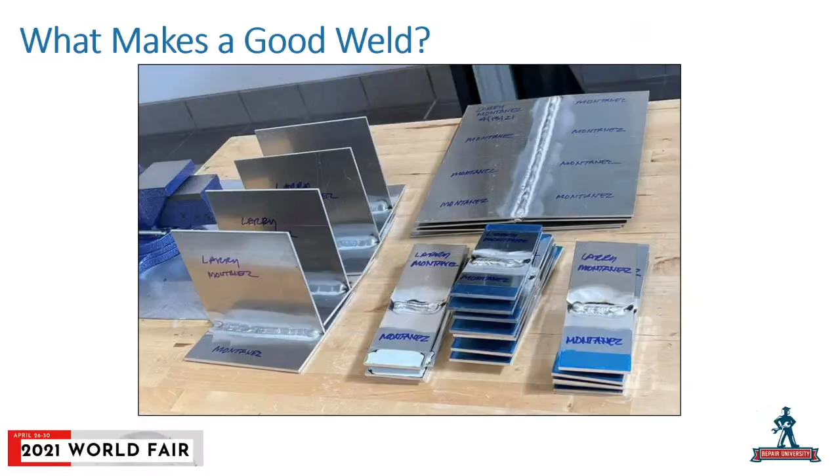We hassle Larry a lot, but let's give Larry his due as well. This is your most recent work. Good, thanks. A golf clap for Larry.

One thing I want to kick back to is the reason we're doing the weld strength show: cars are held together with welds, and if we're not practicing, our first few welds may not be good. So we need to do weld tests, destroy them, and talk about the mechanics of it. But as an industry, I hate to say it, we don't weld well.

It just goes back to practice. We'll talk about aluminum at the end, but with aluminum you've got so much more because it's got to be clean. In this case here, this is my Mercedes-Benz welding test I recently took.

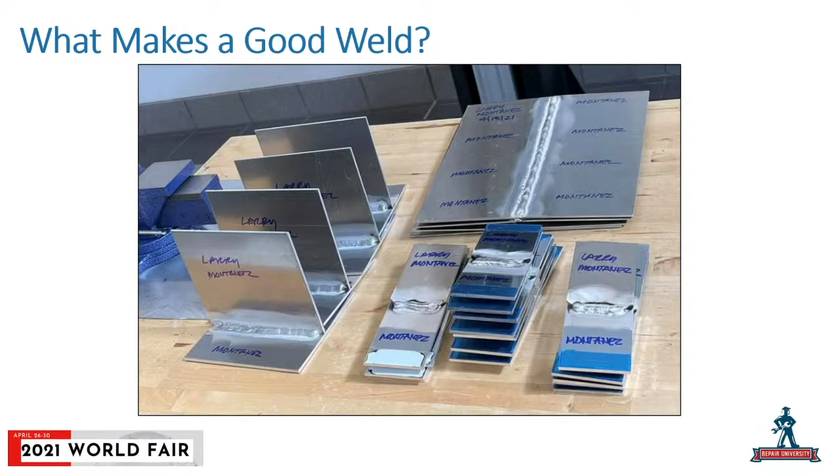Those 4 plates in the back, the really long ones, the 300 millimeter ones, I think that's 10, 11, 12, and 13 that I made. The rest, the first 2 or 3 were good. I had a little divot in one spot, or a little suck back in one spot. It's like, oh man, 300 millimeters, and I got this one.

The T-welds are pretty easy. I made 2 practice ones, then blew out all 4 of those. The cast ones, I basically just make them and start welding. I might have one bad one out of the 5 or 6 I make, and then they're ready to go. Then I choose which ones I'm going to put in for testing.

Concrete floors, lifting things without using my back, without my legs, and your shoulders hurt, and you've got this big huge plate you keep bolting to. So it's this kind of motion constantly, but you're doing it 12, 13 times, and then you're welding like this. It's a younger guy's job in a way, so it can be nerve-wracking, but the practice comes in handy.

I still want to dive a bit more into aluminum when we get to it, but I want to take a different approach to your question about how often you need to practice. I can appreciate where he's coming from and don't disagree with any of it. For me, the most important thing is that you practice before you weld on the car, and you've got everything where you need to be before you make that transfer.

This afternoon we're going to talk about practice welds and why, you can see a bunch of coupons we made here, why I don't want to take this and then jump over to the car. We're going to talk a little bit about this afternoon. But that's my answer to your question.

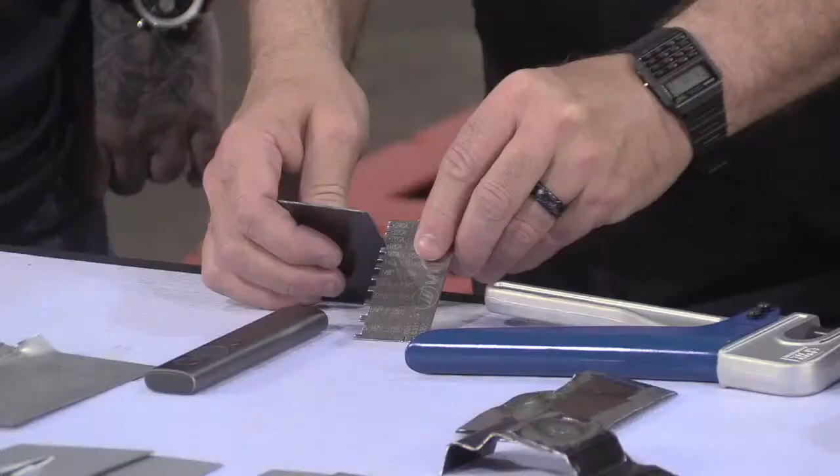Let's prop that up for you, Avery, maybe here, if I can, maybe not. It's okay, I'll hold it. All right, try and do it that way.

So now I know whatever thickness of material I've got, and then I can look at that OEM procedure and say, well, what electrode wire do they recommend? And more often than not, if I'm dealing with 22 or 20 gauge, it's ER70S-6 or 3, 024, 023, depending on your material supplier.

If I start getting a little bit thicker material, 16 gauge or 1/8 inch or something, now it might be 030, 035, kind of the high end for steel. So we're typically dealing with 023, 024. 030 or 035 are going to be the most common three, and the ER70S-6 or 3, depending on what manufacturer. So now I know I've got my electrode wire, I've got my material thickness.

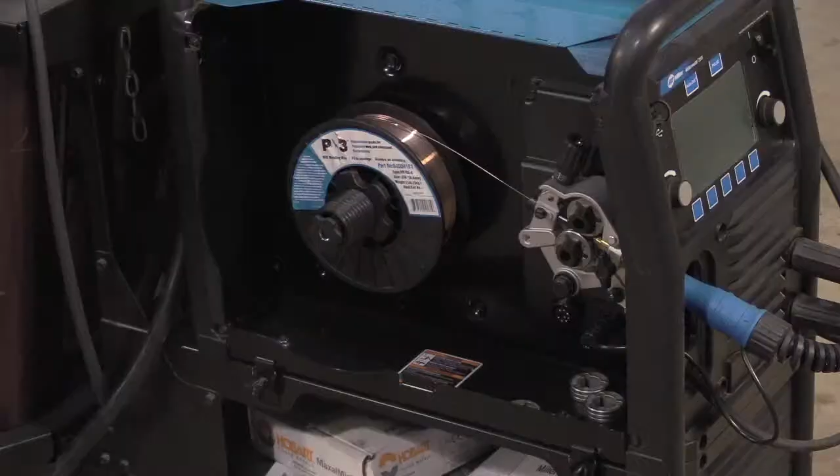Now I can open up my welding chart, my welder, and look and see where I should start my settings. I think it's obviously a great place to start, and I'm going to fine tune from there based on how fast I'm going to go, how slow I'm going to go, maybe my own personal technique, stickout. There's a lot of variables, so this is just the base part of it.

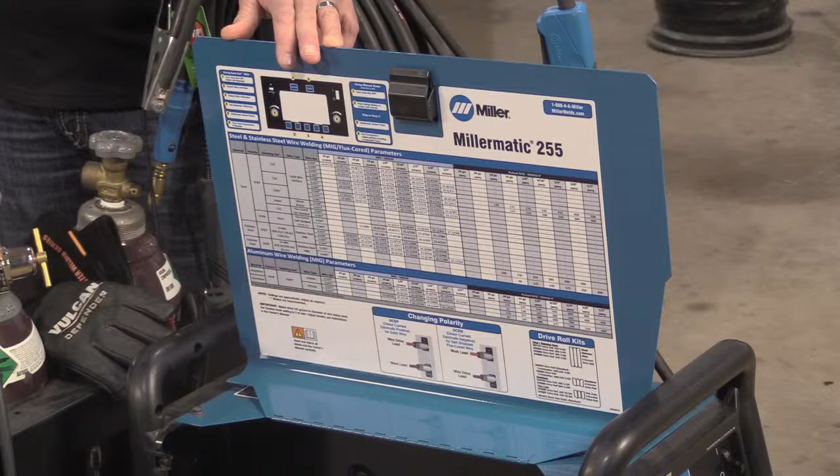And then this particular machine has the auto set feature on it as well, that you can just set the material thickness, the electrode wire, and the material thickness for the particular welds you're going to be making.

So auto set is not a substitute for test welds before you work on the car? Correct. Yeah, and again, same thing there with the auto set, we can still fine tune from there. But I mean, I love the auto set on the Miller machine, and obviously the charts from the equipment makers make it a little bit easier to know exactly what I'm going to have to deal with. But it just kind of gets you over the target.

What are some of the variables or hurdles that I might encounter in that process of identifying the material and then looking on my chart and setting up? What are some of the things that might go awry? Well, you have a definite substrate difference between a mild steel panel, a high-strength steel panel, high-strength low alloy, or even an ultra-high-strength martensite or boron-alloyed steel type material. You have to take that into consideration. They're going to weld differently.

GM has a panel with a coating on one of the reinforcement panels that was a little difficult to weld. Almost like aluminum, you had to super clean it down really well to get a good weld. If anyone's welded galvanized steel like you see in heating ducts, it's next to impossible to weld. It almost looks like it's got a starburst type silver spray paint on it, and you've got to get it off because that's how that material is made. It's not painted, and that's why you always see raw metal versus galvanized.

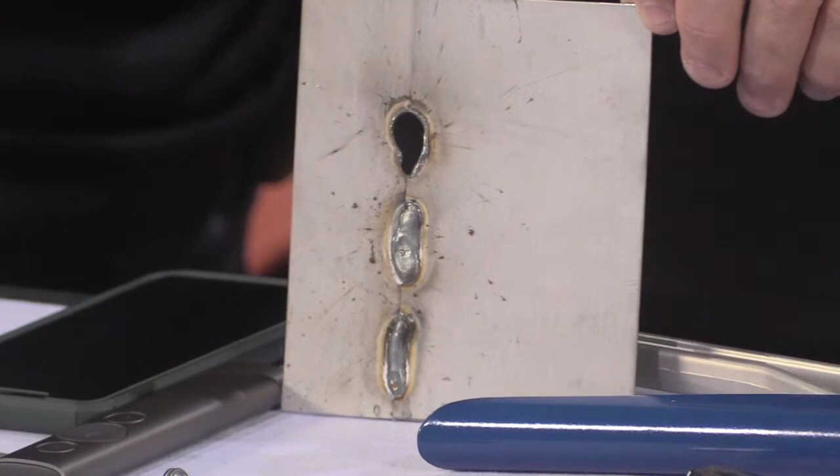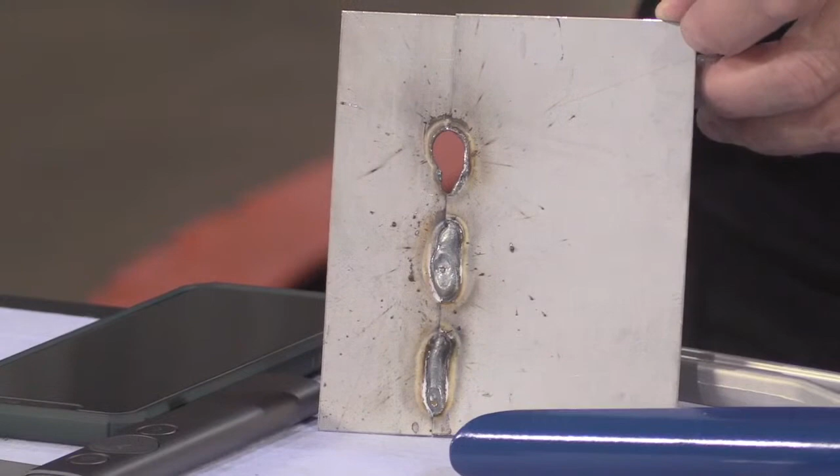Did you do those? Yeah, I have made some bad welds too, right? I think your setting on the first one might be a little off. It was plastic repair yesterday, and now it's welding. Well, now you can rivet it - now you got a hole punch for a rivet, a very large rivet, but you made a rivet hole now. I was going to make a Mig brazing slot weld. I see what that looks like. I'm getting you a drill bit and a grinder for Christmas.

All right, so this one, I used the auto set on this Millermatic 255 here, but I had it set for 1/8" steel. Now, 1/8" steel compared to - 1/8 is 0.125 and 22 gauge is 0.030, so there's a pretty big difference between the two.

So yeah, as soon as you squeeze the trigger on this one, boom, it blew a hole in it, like it wasn't even thinking about it. So you basically made it a plasma arc cutter, right? Exactly - an expensive plasma arc cutter.

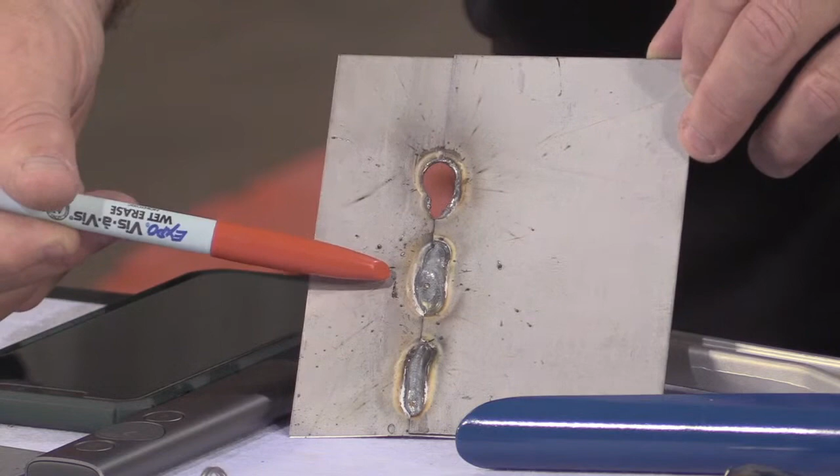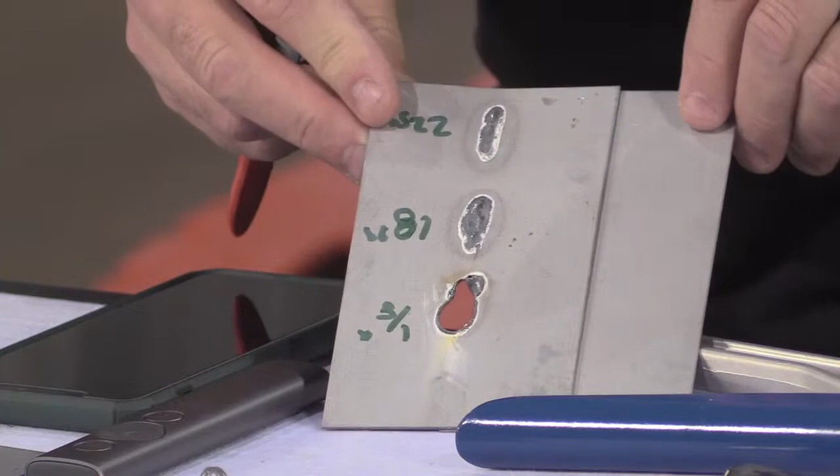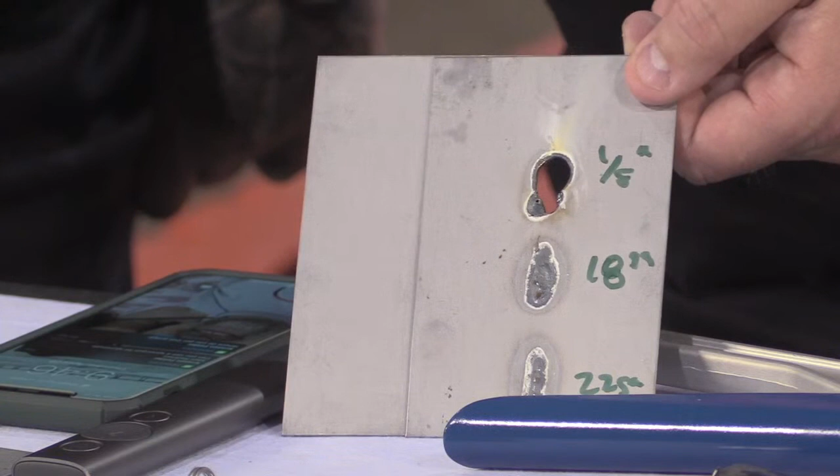Now this one was made with the 18 gauge setting, just the auto set, no fine tuning, and this one was made with the 22 gauge setting. This one here, from a profile standpoint, is a little bit flatter, a little bit hotter, so it got in there a little bit quicker. The 22 gauge setting is a little bit higher. Penetration on the 18 and 22 isn't bad - I've got decent penetration on both. Realistically I want to be at the 22 gauge setting, but based on my speed and technique, I could potentially get by with the 18 on this one.

But I think it's important to make sure you've got the right settings - that's kind of where I wanted to go. The one thing with these charts inside the machine that I have trouble with is I get lost. I start, okay, get this wire, and as I move through a chart, next thing I know it doesn't seem right, this seems like the wrong setting, and I go back and maybe I was on flux core, or maybe I was looking at the 22 gauge chart instead of the 035 chart. So it's paying attention, reading, interpreting, and knowing where is a great place. But like I said, it shouldn't have been an issue on this auto set machine unless you set up for the 1/8 by mistake.

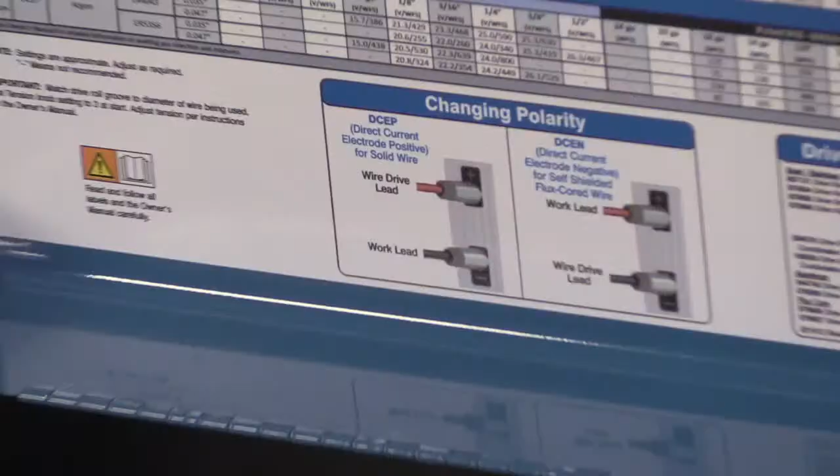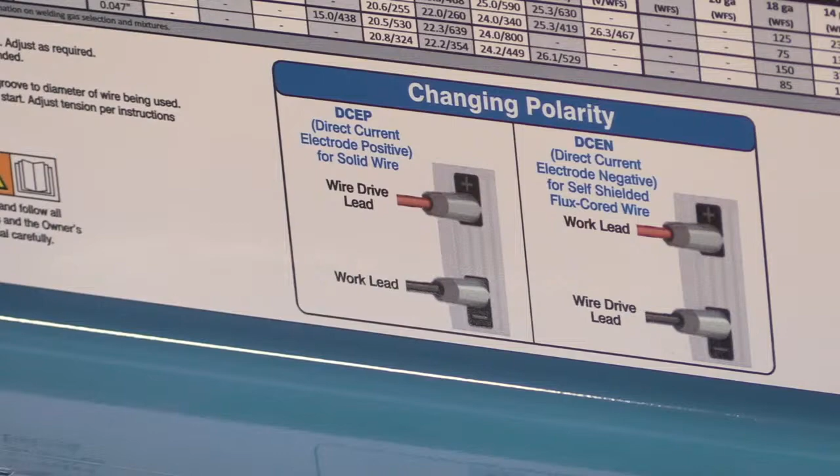Shops have to realize that Miller, or any welding company, makes welders not just for cars - for industrial stuff too. And they usually come DC negative, and if you look inside the machine it'll show you that you've got to switch the red and black wire to go DC positive. If you just open it up, put it together, and go to weld without an equipment guy setting it up, you're going to start this thing up and it's literally going to become a plasma arc cutter on this thin material. No matter what, even at the lowest settings, it's still going to zap through stuff, and the wire's going to burn back into your tip because it's made for frame machine welding, flux core - that's what it's designed for. So now you've got to switch it, that's all you've got to do, and then all of a sudden all the settings and everything work better.

So just keep that in mind. You should only have to do that once because you're never going to go back.

But yeah, if you buy from a company that has a tool supply that's going to deliver it and put it together for you, great. If you buy a Miller, a Hobart, or you buy something online that gets delivered, you check that first because you're going to go and maybe not practice and go right to the car, and you could have an issue.

And getting really familiar with this, if you get a new welder, spend some time with the chart so you don't wind up getting lost, right?

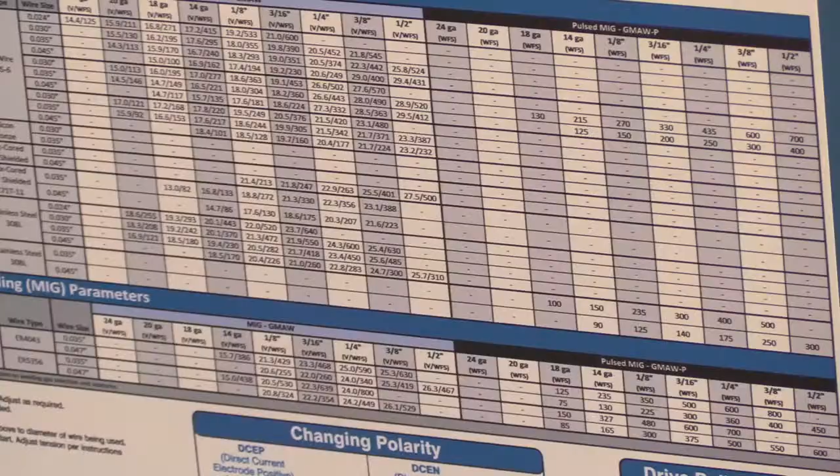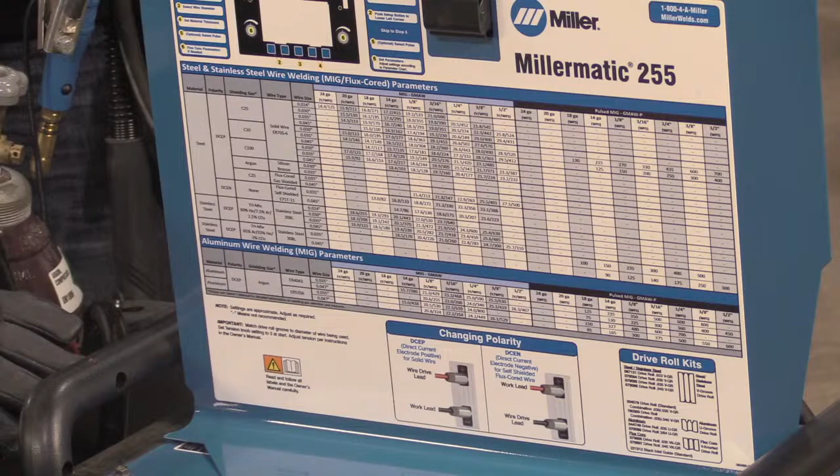Yep. And Miller has great videos online, just how to use their welders. You go online, either YouTube or their page, and they've got a whole weld theory thing you can watch, and they even have a little online testing thing you could do just for yourself. But they have videos on how to set this, how to set that, if you get bird nesting, how to take apart the spools and the drive rolls and how to put it back together. So just remember that.

So two things with that. One, Miller's recently released a collision-specific YouTube page. I should have looked it up beforehand, my apologies. I think it's called Blue Collision, or maybe that's not the name. So do a search for Miller collision. There's a lot of videos on there, including some Collision Hub videos. So thanks to Joe for that, and hopefully this one will end up there in the not-too-distant future as well.

So thanks to them. The QR code piece of it, the maintenance of it, we've been talking about, and we're going to work with Sled on this so that we've got some QR codes we can put on there. Take your phone, zap it, and it'll show you a video on how to change the drive rolls, how to change the electrode tips, how to change the electrode wire. But knowing what you've got in there and making sure you're watching those videos so you're doing it properly is important. And we're going to talk a little bit more this afternoon about the Collision Hub OEM Welding Validation Program. And we'll talk a bit about the drive rolls and a bit more of the maintenance and some of the courses that are around with that as well.

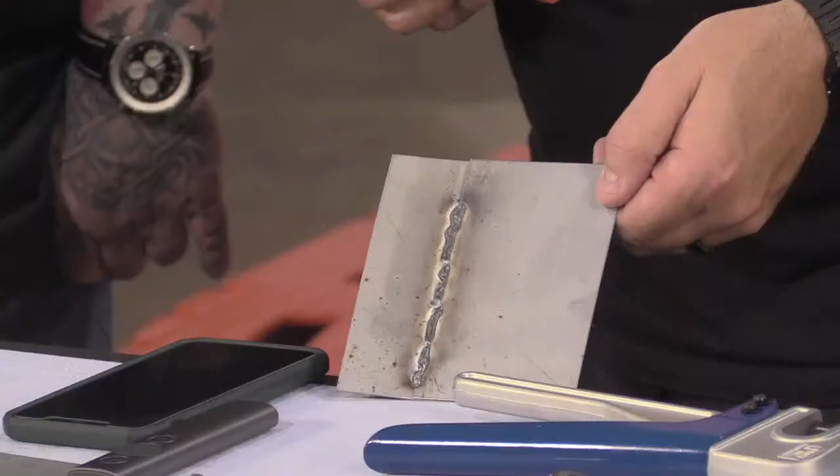So, all right, I did want to make one more point. What I did with this, I kept it on the eighth of an inch thickness machine, just to see if I could breeze through this thing with this 22 gauge. And this is kind of the result of that. So I had to go super fast. I've got a little bit of penetration here and there, but I had to go fast.

I missed the joint a bunch of times. I got some porosity because I was rushing. But again, this is something that we see on cars from time to time, right? And this is not a good weld. Clearly not a good weld.

No, and this was a setting issue and a technique issue all the way. Had I adjusted the settings to be proper, I might have had a much better weld on it. Well, to compensate for the overheating of it, or the higher setting, you had to run faster, which just makes you very sloppy and has you dipping in and out, and that's why you missed a bunch of times.

Yep, and the one thing about this is, so we've got the thickness, and we've got the wire size and the thickness, but the one thing we also have to pay attention to is what kind of steel it is too. Sure, is it high strength, mild, whatever it is. And then, so not to bash you here, but none of these would be test welds for any car you'd ever repair.

Right, this is just understanding technique and all that. Now, you might use this as a test weld for the car, but these right here, this is just practice, getting technique tuned in, and all that. Yeah, the I-CAR style coupons that you can buy at any metal supply company.

You can get them cut to whichever size, or some I-CAR instructor left a bunch over there when you took a test. Those are good to just practice and get used to the machine, get your settings. When you're ready, you need to cut material from a vehicle and practice the welds on the same type, thickness, material that you're welding on the car.

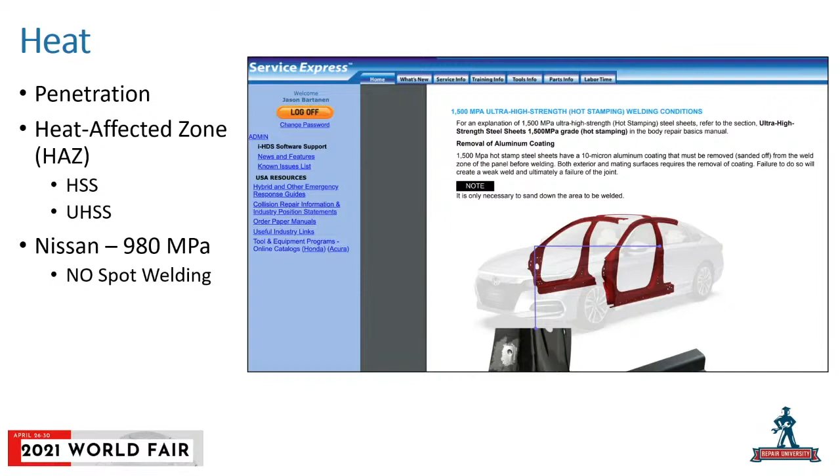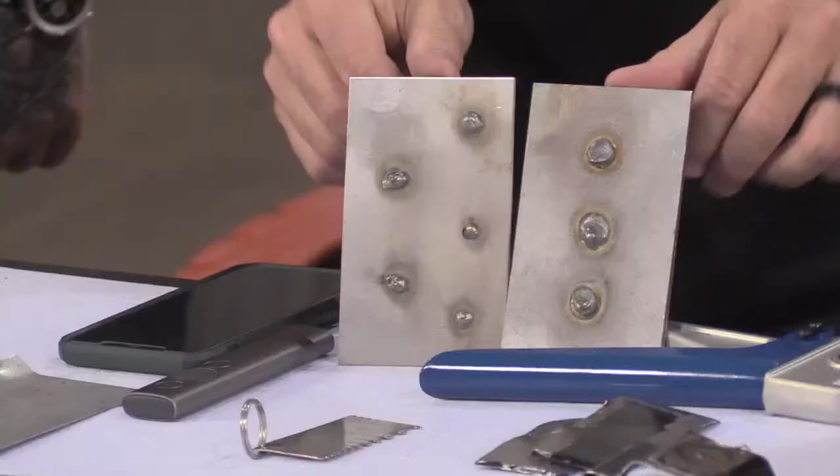So let's talk about plug welds for a little bit before we move on to electrode wire, technique, and beyond. What we've got here - we've got a couple different plug weld samples. Now we've got an OE, and most OEs are going to have a recommendation for plug weld size based on the material thickness and type. We may be doing a 6mm plug weld, we may have an 8mm plug weld. There's some 10mm examples out there as well.

What's that? I don't know what he's saying. No, okay. So what I've got here is some 6mm and some 8mm plug welds. These are 8mm plug weld holes, so the top coupon had an 8mm hole in them. Here he's going to come in - oh, there we go, sorry. That's what he meant. Oh okay, I thought I was stealing second.

So these are also made on 18 gauge coupons, which would make sense to have a little bit larger hole, an 8mm plug weld hole on it. So these are all pretty good. What do you think of those ones? Since you guys have been hassling me about everything else, are those okay?

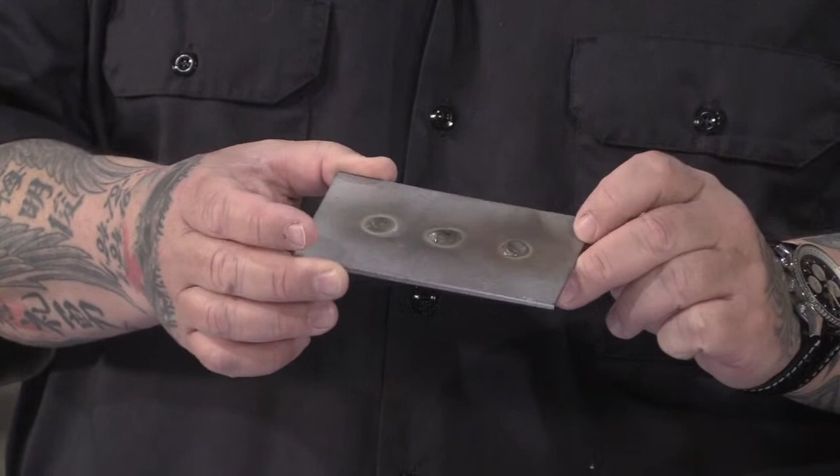Well, like anything else, you got to take a look. Most of them - there's two of them that are good. This one would pass, it just stayed there a little long. I'm going to try and rotate this a little bit, see if we can get that divot - Kristen made that one, okay. That's actually very good, Kristen. Normally the weld's over here and the hole's still there, but these are very good.

And then we have the back side, which should have a ripple to a certain extent - those will tear, and I believe all of them will tear. This one's just a little ugly and a little high and misshapen a little bit.

And these two are very, very good in that fashion there. Good, thanks Larry.

All right, pass from Larry. So what I've got here is a variety of 6mm plug welds, and I made these intentionally the way we made them. Let's flip this one up so I can see it. So this 6mm plug weld I made by just putting the electrode wire pretty much right in the middle of the weld. I squeezed the trigger and moved very little around that.

It's a small weld, right, 6mm is not very big. So I just made that one, got good penetration, and got a decent sized face on it. So I'd be pretty content with that. If I was going to make a bunch of plug welds on a vehicle that required 6mm, I'd be comfortable with that one.

This one, I started on the outside and worked my way in at about the same speed, but I had to go around a little bit more because I started on the outside of the weld. I got some decent penetration on the backside here. One thing, if you start on the outside, especially on a smaller weld, is that electrode wire can fill up that hole before you get into that bottom coupon.

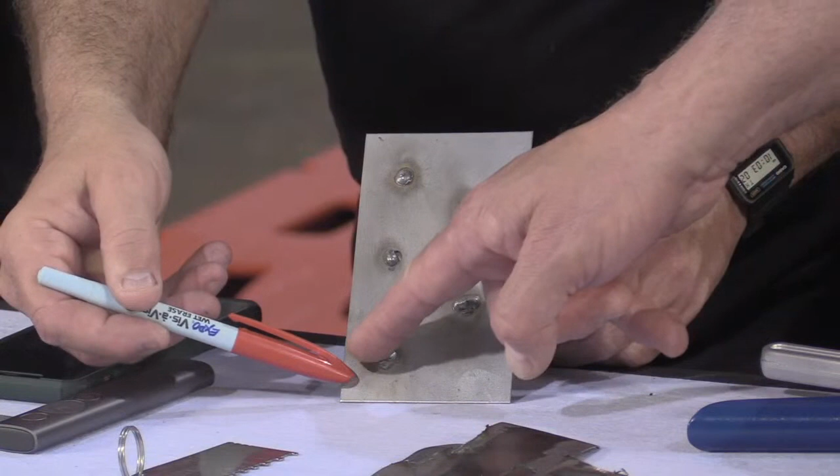So let me go back to this real quick. If you look at the heat-affected zones, the amount of heat radiating out from each of these, you went around and around on this one. Notice how big the heat-affected zone is around this one versus all the other ones. See how big this heat-affected zone is - that's an inch diameter almost. You're actually destroying it, throwing heat into it, which starts to change the molecular structure.

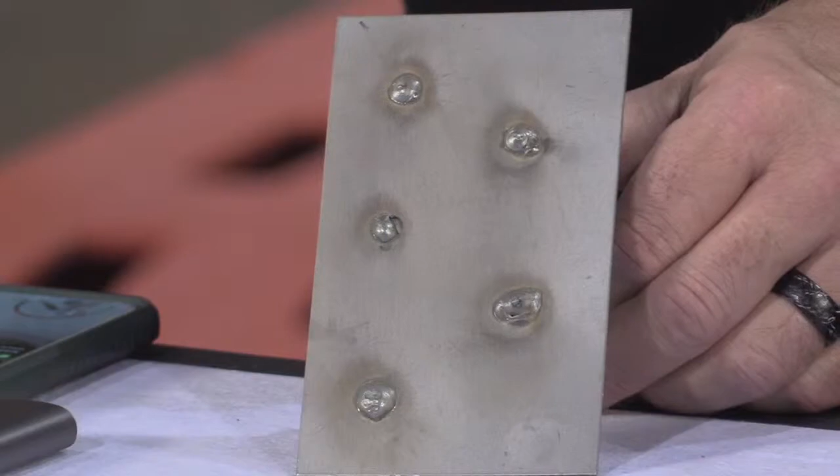Another thing about that big fat weld at the bottom, probably on the I-CAR test, which is where the 6 millimeter hole came from - more than likely you'll look at it and think this is a good weld. It might be a little high, but let's break it. The back piece might just fall off because you had so much heat, you never directed it to the back panel. You only caught the front panel, and as you welded, you literally welded the round circle edge, and the rest just overlapped and never grabbed the back. That's sometimes a false positive - it looks good positively, and then you go and destructively test it, and it's no good. I did something wrong here because I didn't point it at the back joint first.

We're going to talk about all that this afternoon - destructive testing and what happens.

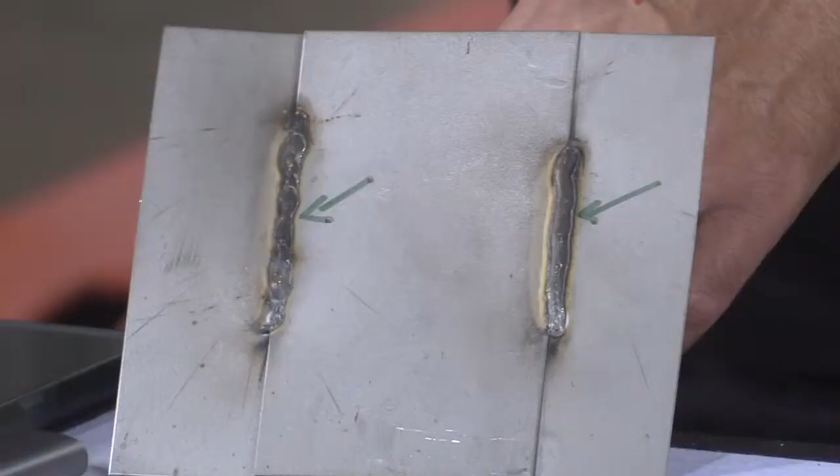Okay, so let's continue with technique a little bit before we jump into electrode wire. So this is a weld - these weld joints are ones that Mark recommended, and I thought it was a great idea. So what we've got here is one coupon sits below this coupon, and the arrows represent the torch angle I used. This one has the coupon underneath and this coupon on top, so this coupon is the top coupon on both.

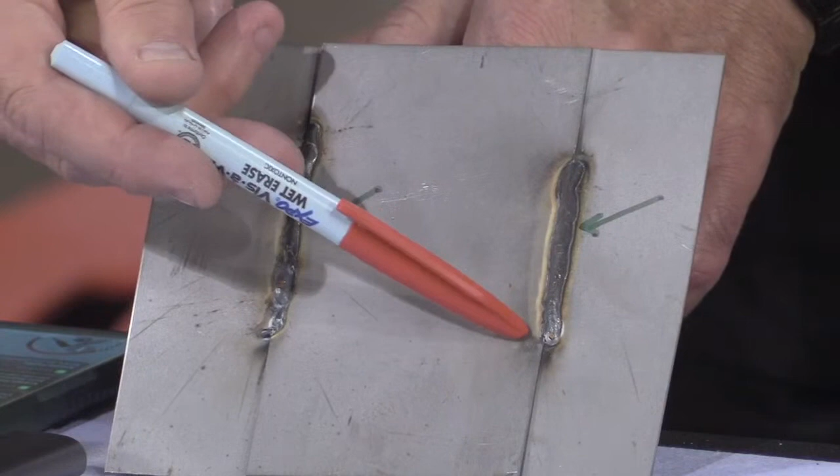But you'll notice this one, I forced the weld into the joint. This one, I forced it over the top, and the only time it would hit the bottom coupon is if I happen to break off or melt enough of the top coupon to get into it. So you can see this one is like a fairly smooth continuous bead. This one is erratic as can be because the wire's going out and it's missing and diving over the top - can't find it. Regardless if you had thicker and thinner here, the fact is you're feathering over the top of it.

It came down to technique. All my settings are great, the wire's good, I got all that dialed in, but because of my technique, I made these essentially the same speed, same thickness - I didn't let it cool, as you can see it's a little bit warped in there in between welds, other than to clamp it up. But the only variable was my gun angle on this one, and that's why it's important to be pointing it correctly.

Same thing with those plug welds - I want to make sure I'm moving that torch around. It's a lot of dexterity, not necessarily at 90 degrees. You want to be perpendicular to it on a plug weld, and stay in your weld, that's where you're punching. So technique's important as well.

So far, the only things that matter right now are heat, technique, thickness, electrode wire. Other than that, nothing matters - we haven't really talked much about the machine. After the settings are done, the rest is all on the tech - which I brought up earlier about it.

It's all on the technique. Just by the gun angle, same settings, you can make a bad weld out of something just because of the way you're running the bead.

All right, so let's talk a little bit about electrode wire. Question on steel: using 030 for outer panel works, but 025 or 026 will make a nice weld.

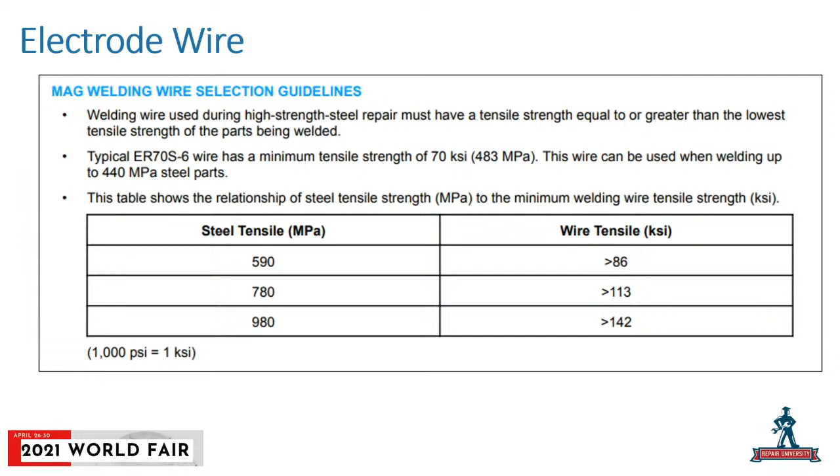So Honda allows you to use conventional ER70S-6 up to material that's 440 MPa. Now, if you get above 440 MPa, from above 440 up to, was it 900 the cutoff, or 1500? But regardless, they have a cutoff, and I think it's 980, isn't it Larry? So from 440 to 980, they have a special high-strength steel electrode wire that they require.

It's now - what was the old one? The old one was a Bosch wire. Yeah, you can get it. I know Pro Spot was selling it for a while, and there's some other equipment manufacturers. When it first came out, it was really hard to get, but now it seems easier.

And if you go on their repair website for Honda, there's actually a listing of where you can get this stuff. They have an article that they update every month, and it'll usually show when they change suppliers. They give you the website, the phone number, and the part number too. And it was really expensive - a little more pricey.

Yeah, the Bosch wire is still on there - .030 diameter, for welding joints, high strength steel, 590 and higher. So they've got a gap in their material from 440 to 590, that's the jump that they made. So you're not going to find 460 or 480 or DP 500 even. It's going to be 440 and lower for conventional ER70S-6, above that starting at 590.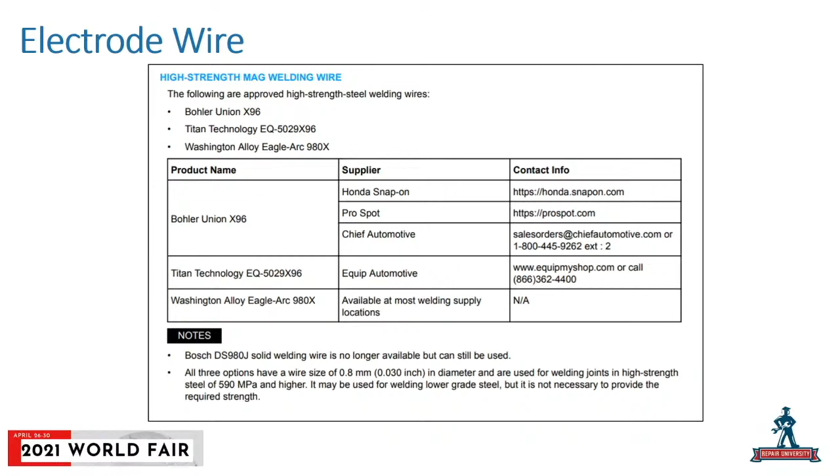We'll have to get confirmation, we'll follow that up when we come back in the practice weld show - so either up to 900 or 1500. I think it may be to 900, and then it just goes 900 to 1500. That's more of the non-repairable stuff, where you're just going to replace panels or components, put a new one on.

Welding it, yeah. And the other thing we wanted to look up too - you told me to do this and I failed you, Larry. I feel shame, I don't remember - was, can I use this Bosch wire on anything? I believe it's in the I-CAR article, and I've got to double check it. But we read some other things.

The price doesn't make sense to use the Bosch wire on - you have to use it on the high-end stuff, but if you're welding on the lower grade stuff, you could still use it, it just probably isn't smart because it's more expensive. So let's keep the expensive wire for the high-strength stuff. A lot of shops back in the day when this first came out said, I'll just buy the Honda stuff and use it on everything. No, that's $500 for a spool. It's crazy for the small spool.

Okay, so let's move on, we're running a little bit behind here. Let's talk about dressing welds a little bit before we move into spot welding and MIG brazing - that's the technical term for grinding. Got it, sounds a little more professional.

So this is a question we still get, like, hey, I don't think I should dress my welds because I'm reducing the strength of the weld. Well, if you're not cutting into the bottom, into the coupons that you welded together, it's okay. Now, I-CAR did a test and wrote an article around this, and there's a video around this too.

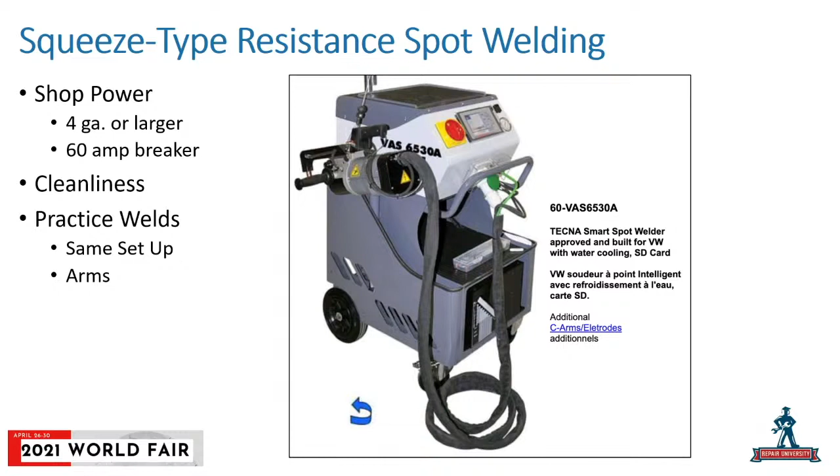So the clean tips is paramount, right, to a good weld. Everything else gotta be clean too. If I got ugly tips, if I got mushroom tips, if I got burnt up tips, metal particles stuck in the copper tips - that happens. What's going to happen if I have that metal material? It's not going to make a proper weld.

Some of the machines still now will make a weld, and you think it's good. Some machines will not make a weld unless all the parameters are right in this machine, and those are the more expensive, smarter ones, and even then they can still make a bad weld. So it's important to realize that. Some of the older machines, you can trick them out and make them weld with crappy tips, and it makes some sort of mark, makes the metal stick together, but destructive testing, sometimes it just pulls apart.

There's no tear out. Part of the issue is, if you look at the tip - and I know we've got a slide coming on this - some of the tips, it's going to make a 6mm weld or a 7 or whatever, whatever the specification is.

But then when you mushroom it out, now it's 10. So it looks like a nice big weld. Yeah, the problem is we just don't have the penetration.

Let's jump to that, because for spot welding the power stuff has been talked about for a long time, that information is readily available. But I think the mushrooming part of it is something that gets overlooked, that technicians just keep going.

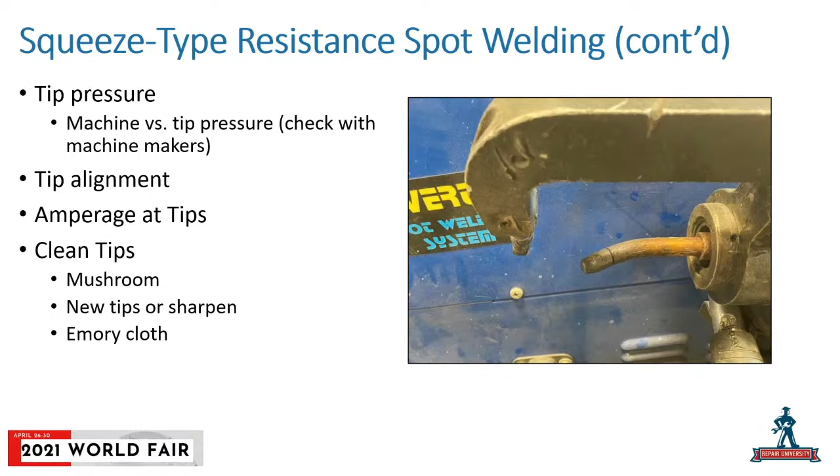And again, we've got our Emory cloth - I might clean that up every once in a while, so my tips might look good because I keep cleaning them. As long as you keep them shiny, they can misform. They're supposed to be like an egg roundy type end piece to it, and it's not supposed to be flat and round like the bottom of the back end of a chisel or a center punch that you hit with a hammer.

It's not supposed to look like that, where the guys walk up with their 80 grit on a grinder and just grind it off. No, that doesn't work either. Only a few shops have the sharpener that they have, and when you sharpen it, it should be like zip, zip, zip, zip, and that's it - not like you sharpen a pencil back in high school.

You can't sit there for 20 minutes trying to sand this thing back into shape. A lot of technicians, they'll get a hold of it, and they might clean the tips up real quick, and then they weld about 80 welds. That's great, but if they're not cleaning in between, paying attention to their tips, it's going to get stuck and you're going to have to break it off the metal.

Now you've got metal particles on there. That might tell you maybe you have to do something. So I want to read this because I think this is really a key part of it, and then we're going to show you a chart after this.

But this is from the Resistance Welding Manufacturers Association: the size and shape of the face of the electrode is related to current density. It is the current density that must be maintained constant in order to make welds of consistent quality.

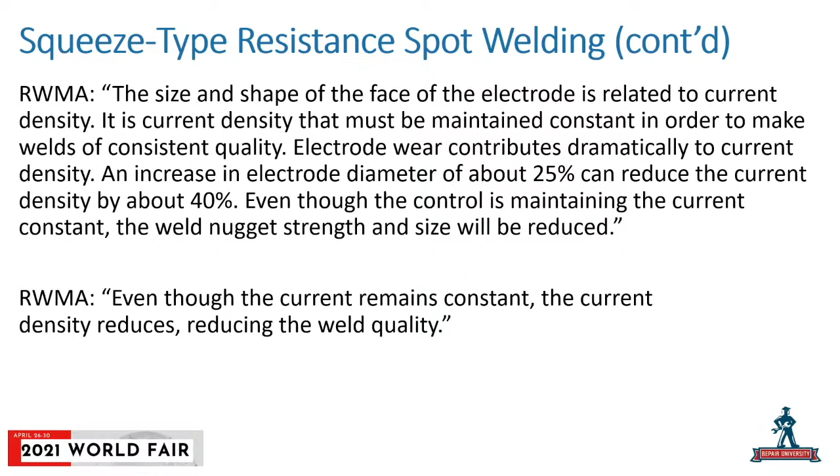Electrode wear contributes dramatically - that's a big word, right - to current density. An increase in electrode diameter of about 25%, which is pretty small on a 6mm electrode tip - now you're at 8 millimeters - can reduce the current density by about 40%. Even though the control is maintaining the current constant, the weld nugget strength and size will be reduced. Even though the current remains constant, the current density reduces, reducing weld quality.

So I remember my teacher in 7th grade, we were talking about geometry. Yeah, and there's this thing called the circle, and the area of a circle. And you figure out the area of the circle with this cool thing called pi. Hi. Yeah, so I like apple pie.

As you move out 2 millimeters, it doesn't just go a little bit bigger, like 20% bigger - it goes like 80% bigger, and they're talking about a 40% reduction in a 2 millimeter increase. So it's not just a little bit less, it's a lot less. And most of that with the bad tips or the wider tips, most of the look of the weld is from the pressure - the pressure joint itself actually making a little bit of an indentation. It's not a weld indentation, it's a compression indentation that basically just sticks together for a second, and there's almost no heat.

So here's what it looks like. This is also in that same RWMA document - this is picture one. A quarter inch, now these are a little bit bigger, right, so this is a little bit more industrial kind of stuff. But here, so a 1/4 inch diameter, 100% of current.

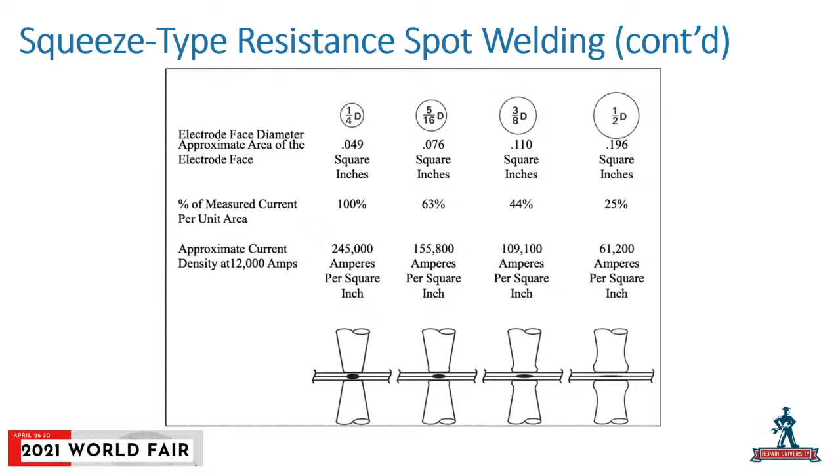245,000 amps per square inch is what's going through there at full capacity. As I increase, again exponentially, up to a 1/2 inch diameter, now I'm at 25% of what the machine power is set for, and I'm down to 61,200 amps per square inch. So that's a dramatic huge drop - that's dramatic on thick stuff like this. Imagine going down to thin metal like this.

You know, where you got 15,000 amps going through it, and now all of a sudden you're down at 7,500. Literally, you could just do this and it'll fall apart.

This is something I've used a lot because I think it gets overlooked. We get complacent as technicians, and we're not the best at maintaining our equipment, and the tips are key. Once we get the shop power and we've got this expensive piece of equipment, I'm counting on those tips. If I don't take good care of those tips, I'm going to have problems, and this is going to make your job harder.

Well, many shops we've been in, like in Texas, had the same tips on it two years later that came with the machine. There's hundreds of cars that aren't fixed right, with no extra tips laying around anywhere. There should just be a bag of tips around, because extra tips mean that you have cooling all the way to the tips. If you just have rods in there, it's not cooling to the tips.

Correct. All right, now let's jump from spot welding. Let's talk for a couple minutes about MIG brazing, because MIG brazing has become a little bit more popular in the past few years. I think Honda really kind of led the way with that 1500 MPa material, areas that you can't reach spot welding tips for require MIG brazing.

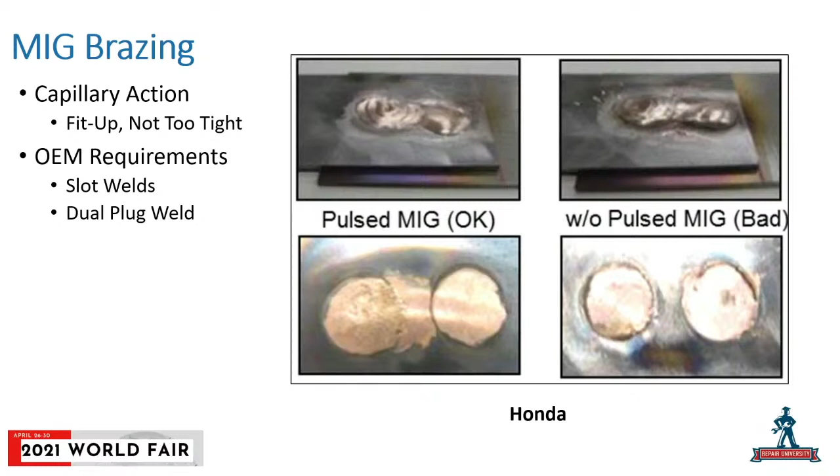And so your gapping in those areas is important. We did a show on MIG brazing, and so your gapping - you can't just have the panels clamped tight, you've got to have a little bit of a gap. Just a pinch of a gap.

Explain it, because that's another important point - we always want to make sure we got good tight fit up, right, that we're not looking for that with MIG brazing. When you have a tight fit up where you can't see light through it, you can't get the material through there because it doesn't melt everything. You need just a tiny little space in between so that you can get the material capillary action - you need it to spit through to the back and spread out a little bit, which works nicely.

And you know, with this, Honda's the first company I can think of outside of Mercedes-Benz that had aluminum steel on the old 216, the S-coupe. Then on the roofs too. Totally. And we're never going to do this repair procedure.

It's the rear floor joist underneath the back seat that you'd have to change if it got walloped in the side, and you had to do slot welds. We never did it, even though we had the machine. But the Europeans were famous for outer panels, welding it to keep the heat down and not have distortion. Honda's the first company that I think launched forward with structural components being this way.

I remember slot welds back in the day, you never made slot welds on anything. Now they have you making slot welds welded on only one portion of it. And then they came out with this thing with two round holes - this is for structural, ultra high strength steel components to keep the heat down.

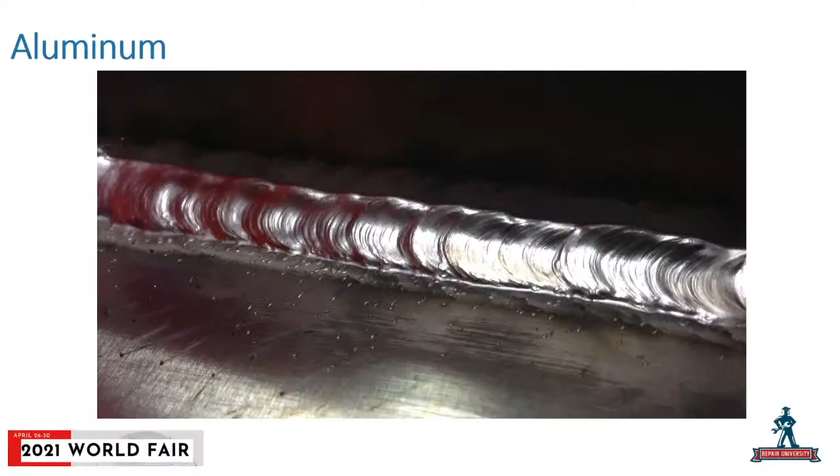And then we did have one question coming in about the use of a spool gun. So never, I'll solve that right off the bat. No, never. Larry doesn't like spool guns.

I believe if you look at the older Vettes when they first came out as aluminum, the Z06 when it first came out, and it was only the Z06, I believe they allowed a spool gun on the program. I'd have to look at the procedure, I think it's since changed. They have newer equipment that they want you to use. Back when I used to teach the Z06 class, it was a spool gun.

But no, the spool gun's great if you want to make ashtrays and little trinkets and weld stuff together, that's great. People are making all sorts of different ashtrays out of car parts, it's all good. You want to weld a little box of aluminum stuff together to put your keys in it, that's great, use a spool gun. You want to play around, that's great, it's a hobby thing. Do not use it for collision repair.

Why though? Well, people are going to ask that question. But first off, it hasn't been approved because it doesn't spit out the wire fast enough. It doesn't have the proper movement of it. And you need, actually, they have dual drive rolls. Most of these gun heads have two little drive rolls inside, and then they got drive rolls inside the machine. So it's a push-pull type system versus just the spool gun alone.

We'll have to verify in the OE thing because I don't know, there may still be some requirements or allowances for it out there. Like I said, I'm unsure about the GM program. I think the biggest challenge I've had with a spool gun is just access - if I'm trying to get in a tight area, I've got this big thing, which is why a regular push-pull kind of feeder works well. But let's verify that there are no OEs that allow spool guns. Say there may be some out there, so I don't want to jump to that with a blanket statement until we verify.

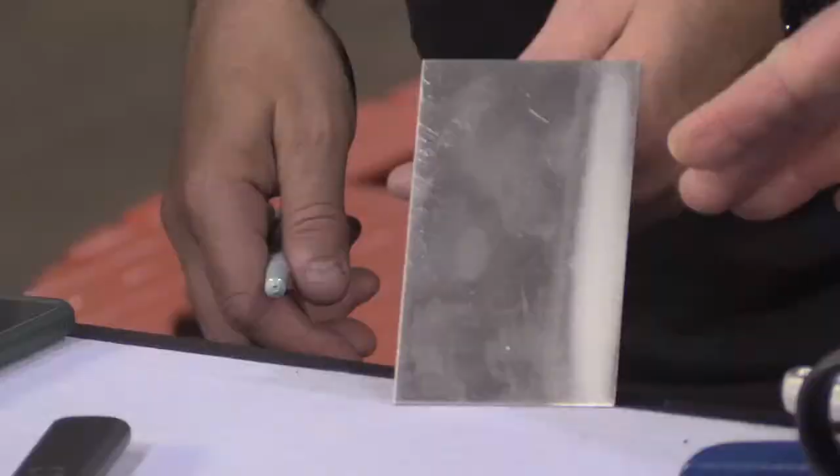But let's say how can you clean it up the right way? I brushed it an hour ago, I'd have to redo it. Right, so you can't just clean it, go to lunch and come back. So basically, this is how your aluminum comes, it's shiny. Okay, I'd have to wipe this off with gloves on with acetone.

After I'm done with the acetone, the table should have been wiped off with acetone. Then I can take a stainless steel wire brush, but I have to check my stainless steel wire brush and I have to put a magnet to it.

If a magnet sticks to it, I shouldn't use it, because it's a stainless coated wire brush, which means I'm eventually going to break the stainless steel off and put steel into this. So I put the magnet on here, and it should just fall off. Now I'm good to go, I can use that brush.

Now you brush it, and I only did this a little bit. This still can't be welded. Even if I just did it, you can see there's shiny material along here. It's got to be super, super clean.

The brush gets dipped in acetone and wiped off also. Now I still have my gloves on. Once I'm done sanding with my work gloves on, I take them off and put on plastic latex gloves. I wipe off with acetone, and now I'm ready to weld in an area that's been cleaned. And after I clean it, you never hit it with a brush again once you wipe it off with acetone the last time.

After I clean it, how long from the time it's clean and ready to go do I actually have to have the weld done? It depends on the environment. Most courses tell you within 15, 20 minutes you probably shouldn't let it sit there. Your greasy hands, spittle, sweat, whatever, is all going to screw up aluminum massively when you go to weld, and you're not going to get the right bead with it.